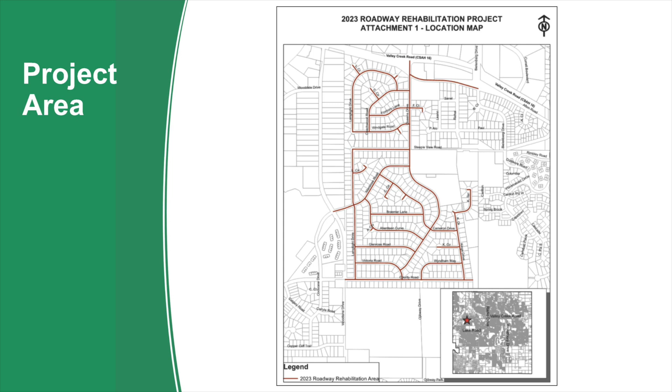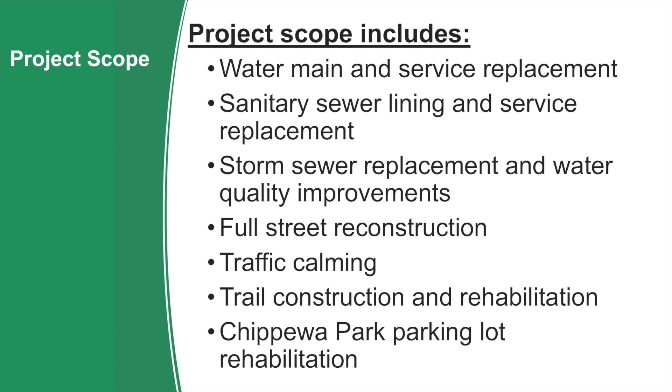So we have our project area. Hopefully you're all familiar with this project. If there's anybody new, just a quick recap of what we're talking about with this road rehab project in the Royal Oaks area. We'll get to phasing here in a little bit, but the project scope generally includes full water main replacement, sanitary sewer lining and service replacement, storm sewer replacement, full street reconstruction, traffic calming, trail construction and rehabilitation, and also repaving the parking lot at Chippewa Park.

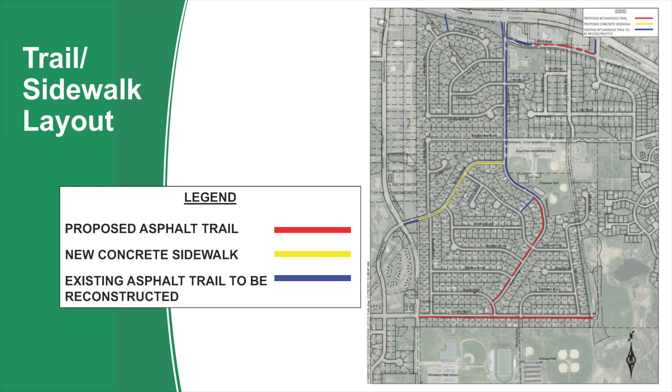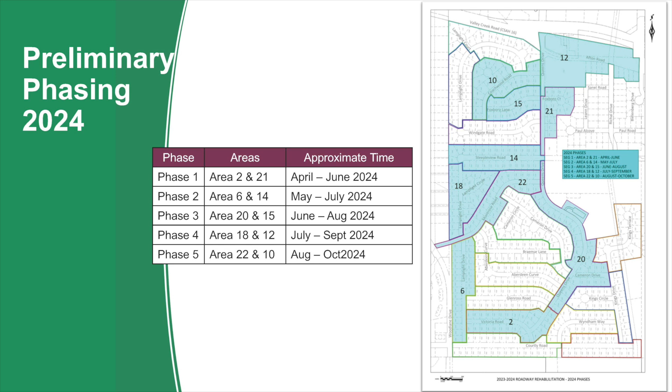So phase one here is going to start end of the month, and each phase will be about two months. We'll get into what to expect for those two months. But basically, generally there's going to be four areas under construction at the same time, so a very impactful project. It'll be a two-year project, so this is the 2023 areas, and these are our 2024 areas. Again, this is posted on the city's website as well.

So this is kind of what to expect in those 2 months. The first week, we'll have some traffic control. They'll be putting up barricades and signs, temporary water, which we'll talk about, and the removal of curb and asphalt. Then a few weeks of underground utility work, street excavation for a week, and then we'll be putting it back together for about 3 weeks, and finally some turf restoration.

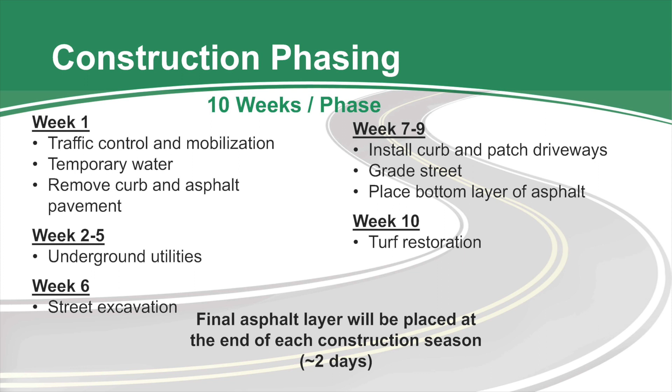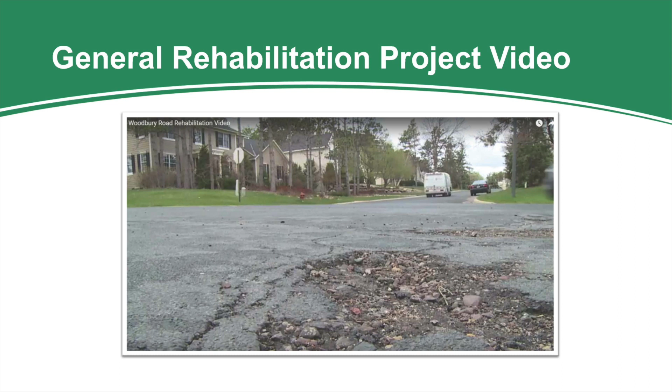This is a video so you can see what we're talking about when we mention curb replacement, pavement replacement, and utility repair. James, if you can put it up.

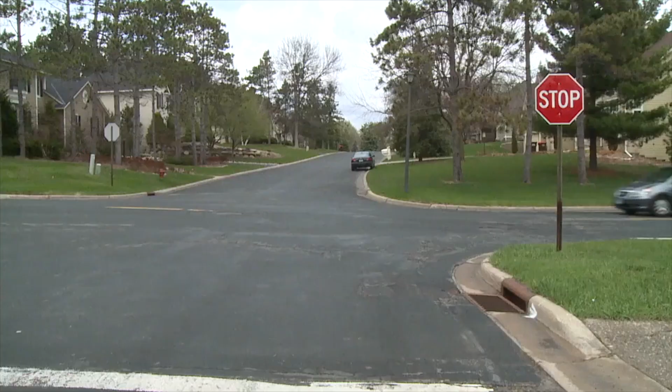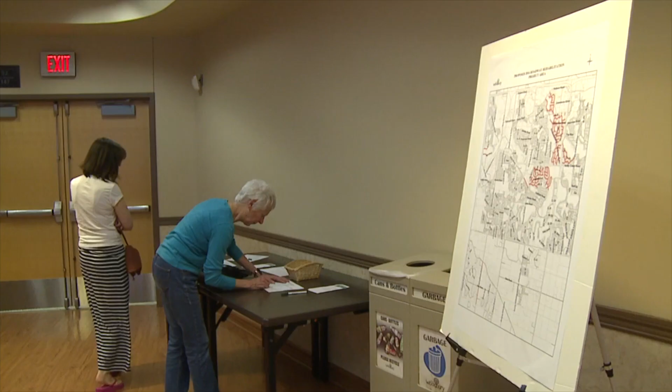Every year, the city improves sections of neighborhood streets in a variety of areas of Woodbury. Most of the roads are in residential areas, which is why city staff conducts a series of neighborhood meetings, open houses, and public hearings related to the Roadway Rehabilitation project. Residents attending these meetings have the opportunity to learn about the construction process, special assessments and funding, how it will impact them, and ask questions about the project.

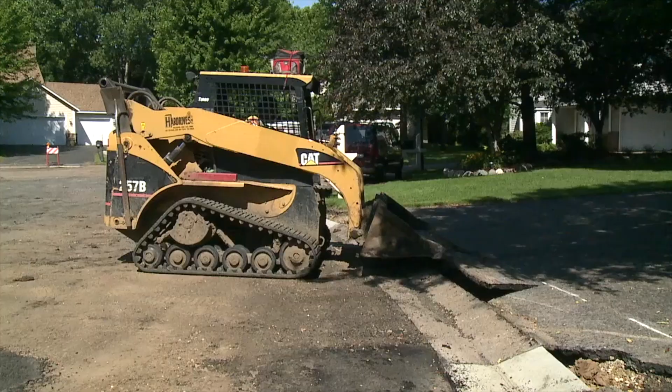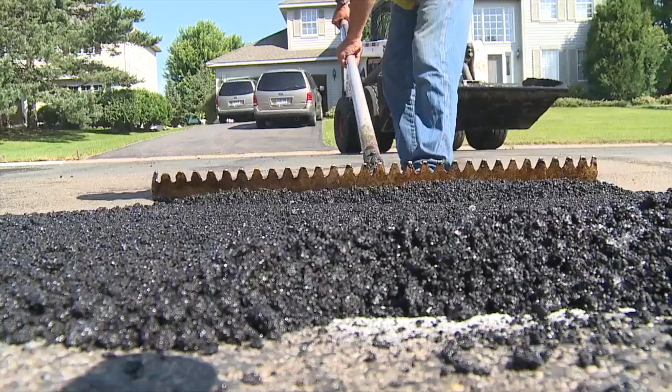Special assessments are a charge imposed for improvements that benefit nearby properties. The amount of the charge bears a direct relationship to the benefit the property receives and is based on the city's assessment policy. Assessments are used as a partial project funding source in addition to general tax revenues and other sources. Once the project is formally approved by City Council, construction begins.

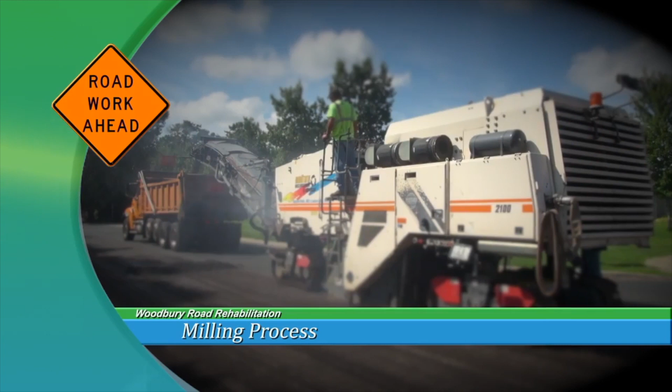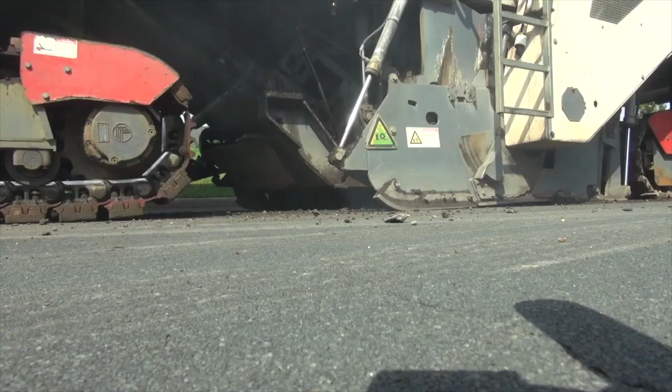The first step in the process is removing portions of the old pavement. A milling machine proceeds slowly down the street as it removes the top surface of the pavement, leaving a rough but drivable surface. In most cases, the roads remain open to traffic through the milling process.

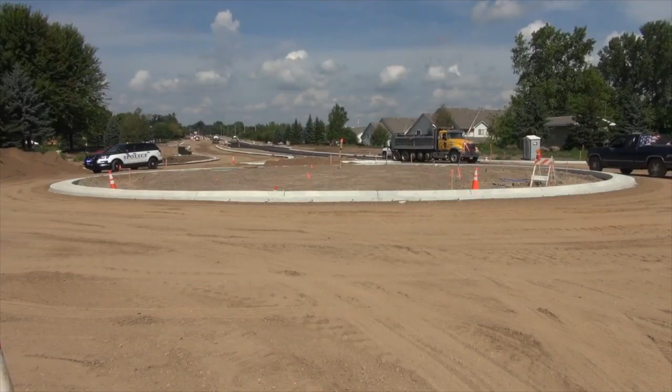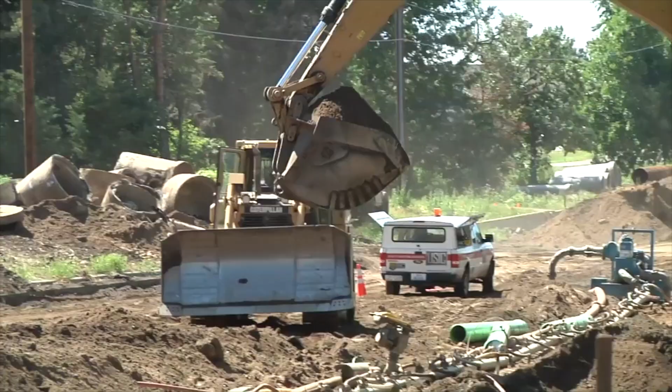Depending on the location of the project, utility improvements might be done in conjunction with the roadway work. These improvements include sewers, water mains, natural gas lines, and communication cables. Utility work requires extensive digging and usually results in temporary lane or roadway closures. Motorists should be aware of detours in these areas.

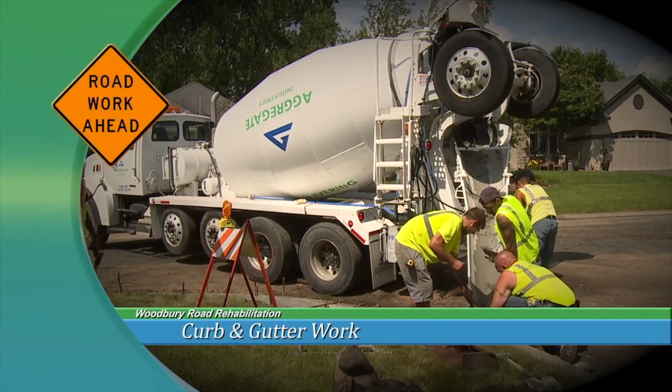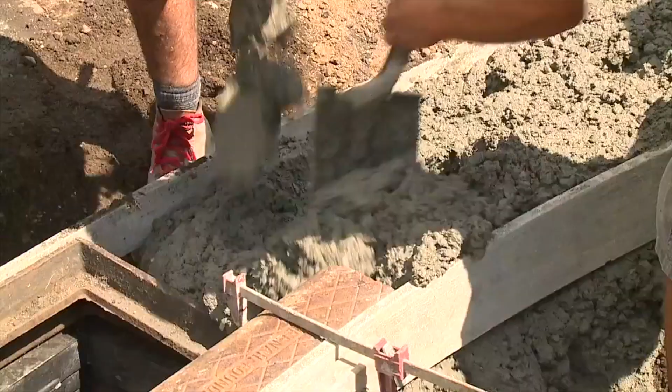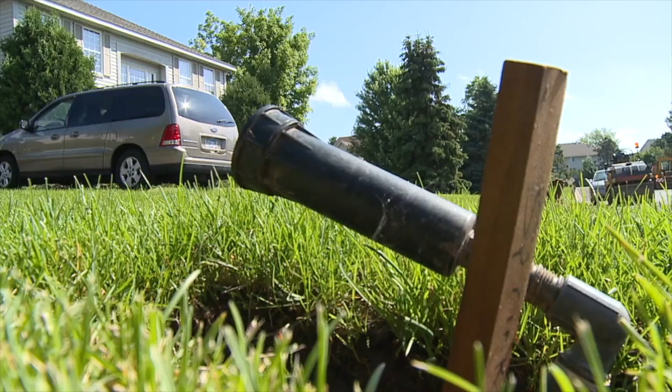All projects involve curb and gutter work. Approximately 1 week before curb construction, sections are evaluated and marked for removal. If your curb needs replaced, you will be notified and given information on how it will impact your residence. During construction, any irrigation systems, dog fences, or other private features within the right-of-way will have to be moved by the property owner. Asphalt driveways damaged during curb replacement will be patched. Damaged concrete driveways will be removed and replaced.

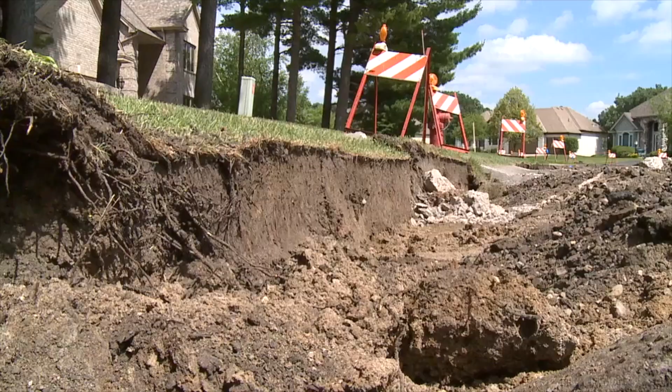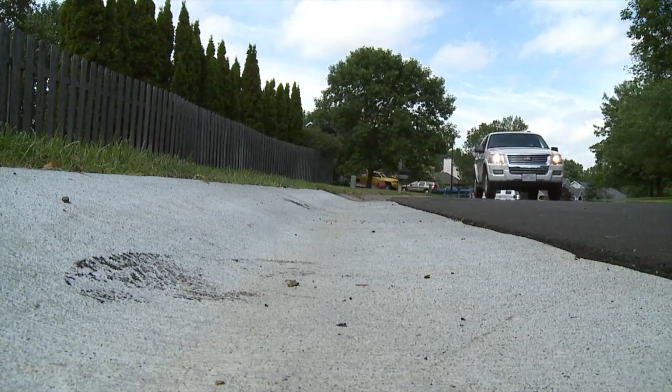Curb work will also impact your lawn. The contractor will replace disturbed areas with seed and hydro mulch, and will care for the area for 30 days. Residents are encouraged to water and care for the areas to achieve the best results. Once curb work is completed, it cannot be driven over for 5 to 7 days.

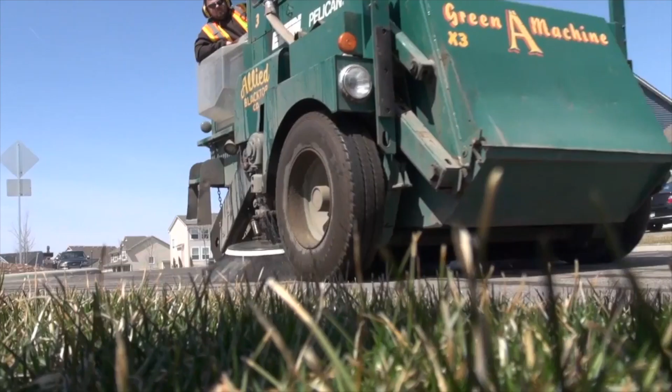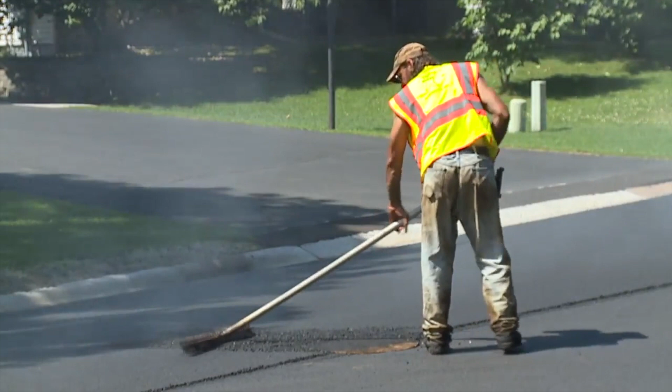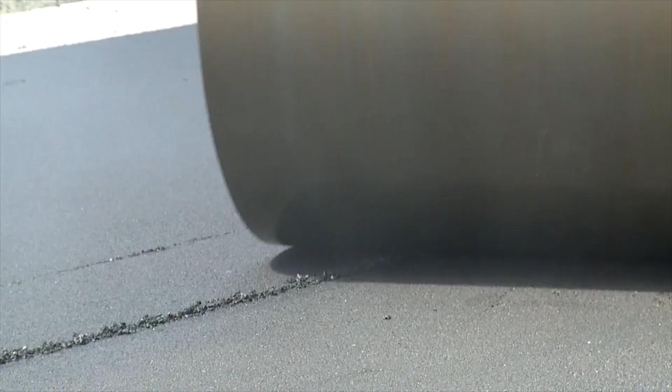Prior to final paving, the street surface will be thoroughly swept. After this step, the final pavement process will begin. Before the new asphalt is laid, tack oil is applied to the road. Residents should avoid driving on the tack oil because it can stick to driveways and vehicles. With the tack oil in place, crews will then begin the paving process. After the new asphalt is rolled and has cooled, it is immediately ready to use.

If you have any questions regarding the project process, assessments, or the scope of the project proposed for your neighborhood, please contact the City of Woodbury Engineering Department at 651-714-3593.

Along with that, we're going to go over some expectations for what construction is going to bring for us. We're trying not to sugarcoat it here. There's going to be some inconveniences, especially with a project this size.

One of the things we've touched on is that weather is going to make our schedule unpredictable. If we have a dry season like last year, we can probably get ahead. If we have a wet season like we've had this winter, or if we don't get warm temperatures, then our construction start date might get pushed back, and all the phases are going to be pushed back beyond that. So we've got unpredictable weather, which means the schedule is going to change.

With this project, there's going to be massive excavations. The water main is about 8 feet deep, so you're going to have a big hole in your street when that work is going on, which will be a few weeks. With that, there's going to be dust and noise. Just be prepared for that, and we'll do whatever we can to minimize impacts.

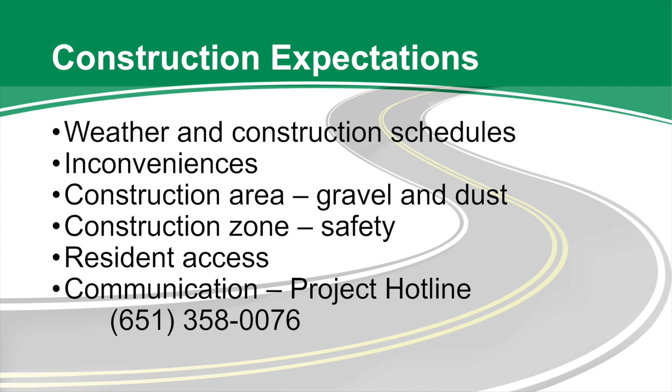If you've got appointments and things that you've got to make, call the project hotline, and we can work with you to make sure that if you've got appointments or essential things that need to happen. Unfortunately, we might not be able to accommodate everything, but if you have any questions, just contact the project hotline.

Safety again, if you've got small children that like watching construction equipment, that's fine, but just make sure that they're staying away from this equipment. They're large, they've got lots of blind spots, so just make sure we're conscious and staying away from the construction equipment.

Resident access, we'll touch on this a little more and Jeff will touch on it when we get to the photos, but the plan is to maintain access for residents for the most part. There will be some times you won't be able to get into your driveway, but for most of this project you should be able to get in and out, and that's going to be the best place for you to park. If you have specific concerns and need driveway access throughout construction, the project hotline is the best place.

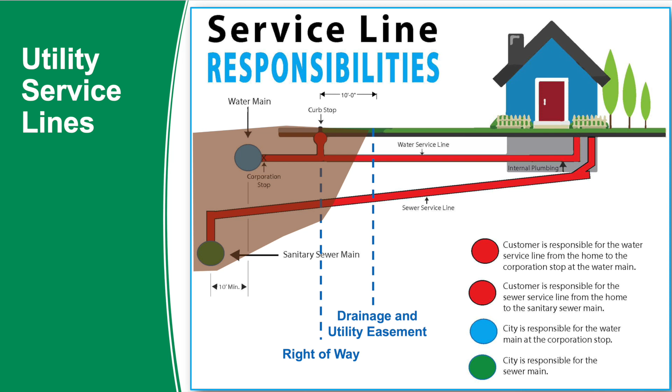And with that, I'll bring it over to Jeff Toutant, who's going to be with Bolton & Menk, and he'll be one of our inspectors on this project, and he can talk about more specifically what to expect with construction.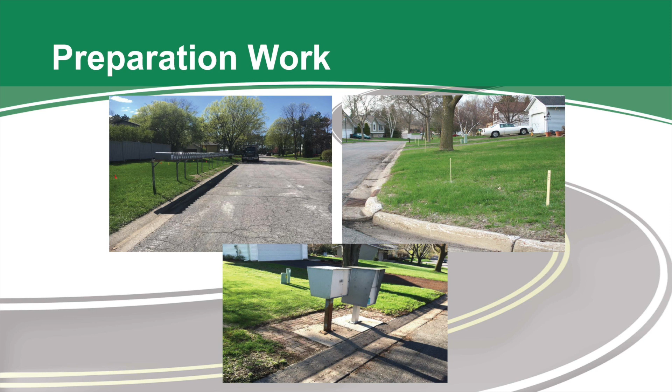I'm going to start things off by saying that video you saw had a lot of very good information on it. Some of that information doesn't necessarily pertain fully to this type of construction we're doing. That project had a lot more street work and a lot less utility work.

What we're going to be doing this year, you're going to expect to see more of the excavation type style at various durations throughout construction. Some of you who live in the early phases of construction might have already seen an initial notice come out about temporary water services. That's going to be the first step of construction that we're going to do.

The contractor is going to come out to the site, and what he has to do is lay out a plastic pipe across the front of yards and make a connection to your existing water line. While that work is occurring, there might be times where your water will get shut off.

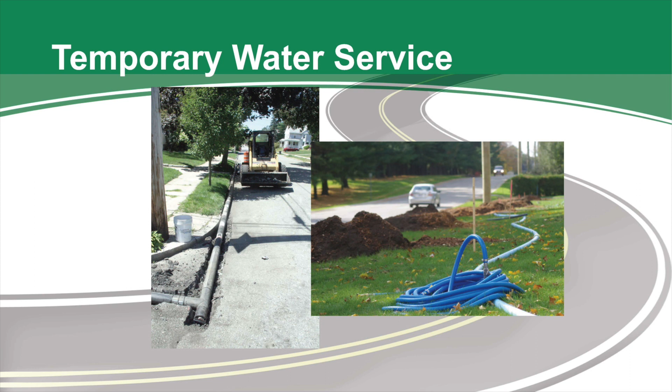You'll always get a notice whenever there's going to be any type of water shutoff in your neighborhood. Typically, the water shutoffs should be 2 to 4 hours. The notices are usually 48 hours in advance, so you shouldn't get a surprise when you wake up in the morning. Any of these notices will be door hanger style notices.

Throughout construction, when we're working in your area, you should keep your eyes open when you're coming home from work. I know a lot of people drive right into their garage when they get home, so make sure you're checking your front door for these types of notices. Also, when we're doing work on adjacent phases to you, your water might be impacted for short durations and shutdowns too. So even if we're not working right on your street at that point, you might still be impacted as far as water service.

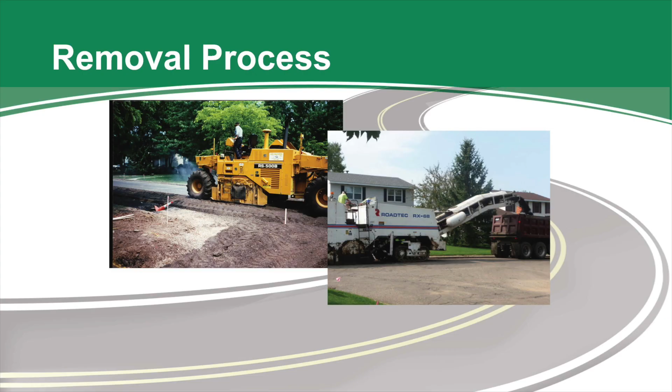Once the temporary water services are set up, the next major step of construction is the removal process. On this project, we're going to be removing all of the existing concrete curb and all of the existing pavement, and there'll be a resultant gravel surface throughout construction. That gravel surface will be maintained throughout construction, so you'll be able to get in and out of your neighborhood.

If you have to drop materials off throughout the day, typically you can get in and stop in front of your house and drop it off, unless the contractor is working right in front of your residence.

When they're working right in front of your house, there may be times during the removal process where you might have a 6-inch, 8-inch, or maybe even a foot drop-off right behind when they do the removals. Just be cognizant of that and keep your eyes open during the removal process. They'll follow right behind and ramp things up, but there might be a duration of maybe 20 minutes to half an hour where you wouldn't be able to get in and out of your driveway.

The first step is, as far as the utility work goes, the contractor will be installing and replacing lines that are out in the street. The last step is making the connections to your existing services in front of your homes.

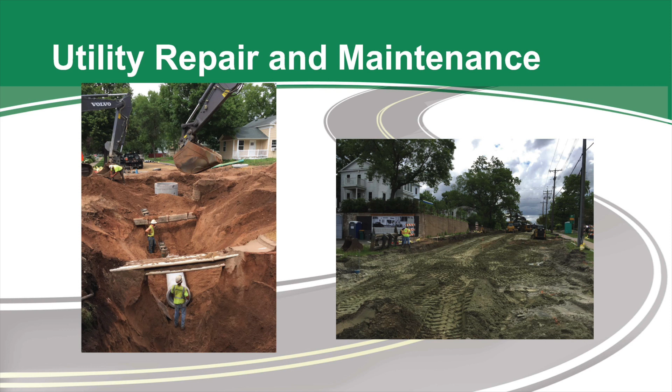When they're working right in front of your house, there's probably going to be a period of 2 to 4 hours where they're right in front of your house, and then it'll be gravel back behind them. While this work is occurring, there'll be trucks going in and out of the neighborhood.

In general, the contractor will do as much as he can. He'll do construction where you see half the road open and half closed. There are some segments where he'll work the full width of the road at a time, but his goal is to do as much half and half as possible because it helps him get his trucks through heading one direction versus going back and forth throughout construction.

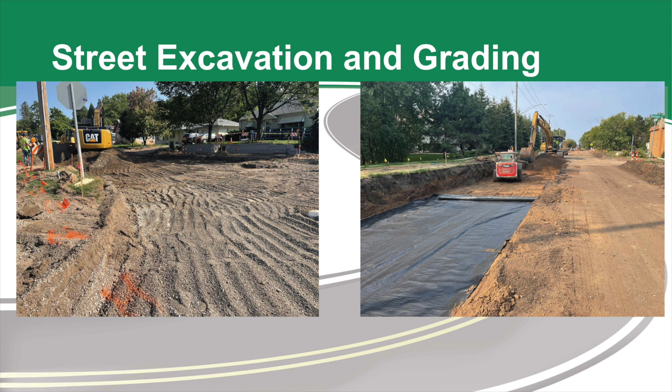Once the gravel placement is done, the concrete curb placement will occur. Most of the curb out here is going to be placed with a machine. There'll be some spot locations where they do hand placement like was shown on the video.

The machine placement is another moving process where the equipment starts on one end of the street and goes down the road. It'll get a whole block's worth of curb done in a day. They move at a walking pace all day long.

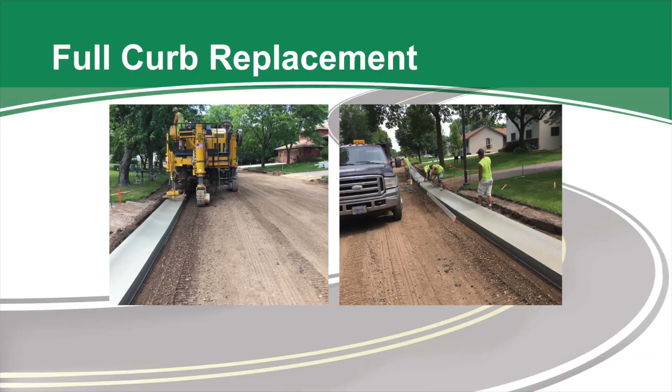So on days where you see the machine maybe down at the other end of the block and you think you're okay and don't need to get out of the driveway, it's important to pay attention to the notices, and if you see that guy coming down the road, make sure you're out as soon as you can. The notices that come will give you information and details of when you should get out of the driveway and where to park during the curbing process.

With the concrete curb placement, there's a period of about 5 to 7 days where you wouldn't be able to get in and out of your driveways. During that time, there'll be designated parking areas on other streets near your neighborhood, in the adjacent phases where there's no work occurring.

If you have any kind of special needs for access, reach out to the project hotline, and you can coordinate. There's an option for the contractor to do driveways and leave a piece out.

Obviously, for ease and speed of construction, if it's possible for you to walk versus needing driveway access in and out, it does help speed up construction. But we understand there are people with needs to get in and out. So make sure you coordinate that with the folks at the project hotline who'll be out in the field on a daily basis.

The concrete driveways will follow right behind, usually a day or two behind the curb placement. That way the curb cures and gains its strength about the same time that the concrete driveways do, to try to minimize the amount of time that you're not able to get in and out of your driveways.

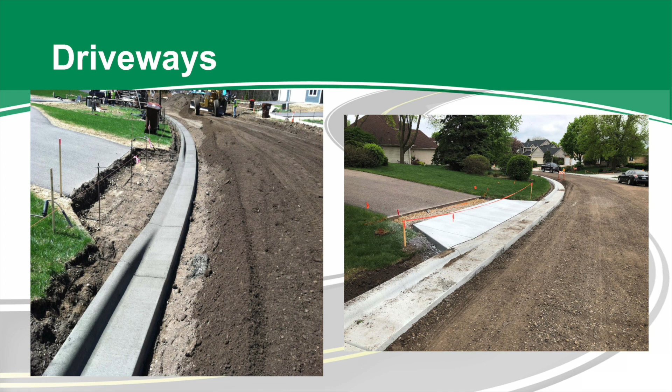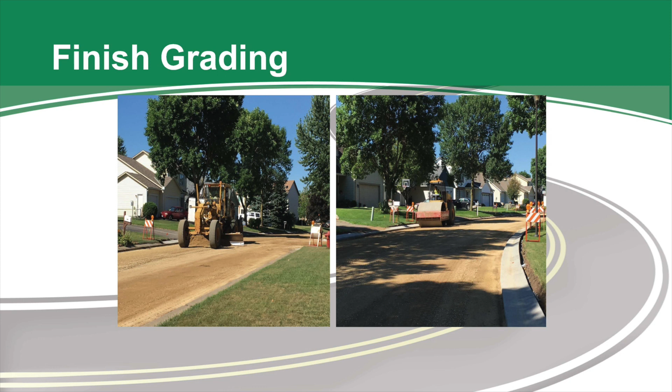Once all the concrete work has had its cure time, the contractor will come through and use grading equipment. It takes up about half the road width each time he makes a pass, prepping that gravel for the final layers of pavement. Usually you'll be able to get in and out of your driveways by that point, and they'll put little ramps in front of the curb so you can drive up over it. If it's the first day or two of this grading process, you might still be asked to park on the adjacent streets.

The paving process follows right behind the aggregate grading. For the pavement process, the contractor places his hot asphalt, and the rolling equipment follows right behind the paver. Typically, from the time the black pavement is initially placed, it's about a half hour before that roller makes a couple passes on it. Once it's been driven over a couple times with that roller, you're okay to drive on it. One thing we ask of residents during the paving process is to avoid turning your steering wheel with your vehicle parked in place, because it will dig in a little bit on the first couple days after the new pavement is placed.

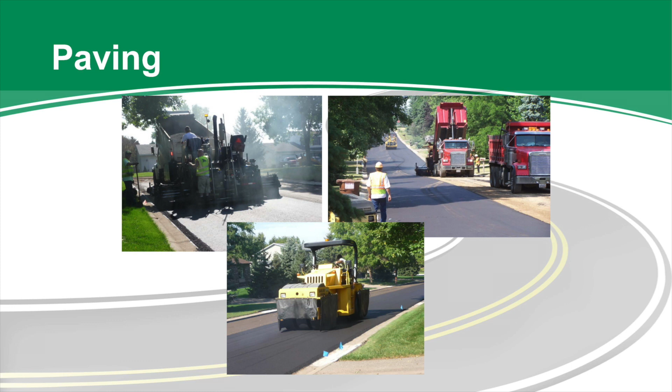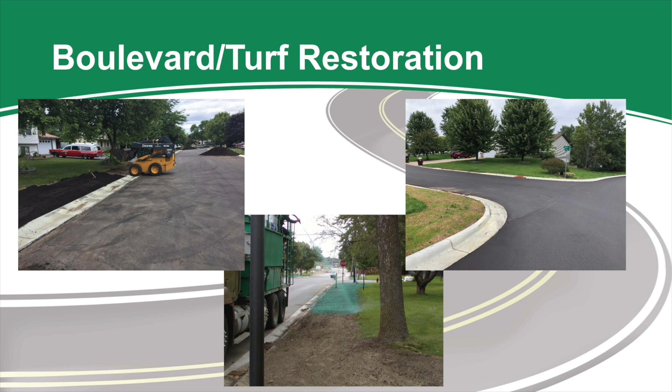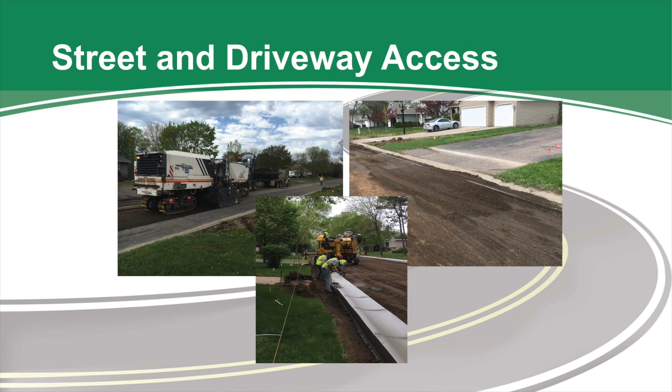I think I've hit on some of the main things for street access during construction, but I want to reiterate, if you ever have concerns about when you can or can't get into your driveway, make sure you're calling that project hotline. That really should be the biggest takeaway from this meeting - the project hotline is the best way to get a hold of folks out in the field. You've probably seen that number 4 or 5 times already in these slides, so we really want to make sure people are reaching out to that hotline. If there's any special needs, or any reason you'd need to get in and out of your driveway, maybe some type of event going on, that's the stuff you want to coordinate with the project hotline. That'll go directly to folks out in the field on a daily basis, so they'll know exactly what's going on in the field that day.

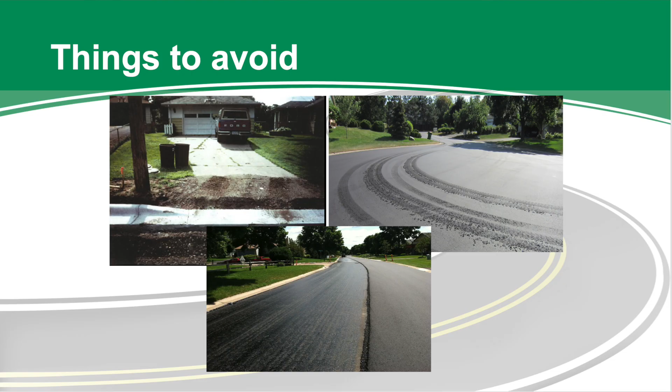And I'll turn it back over to Mike - he can talk through some of the frequently asked questions.

All right, so there's also a handout with a little more information. This just kind of covers some bullet points of frequently asked questions.

Right now, the project is tentatively scheduled for April 24th, and you'll see some construction equipment before that. They'll be starting some temporary water work before then, but you won't see any excavation equipment likely until that April 24th date, and that has to do with some spring road restrictions.

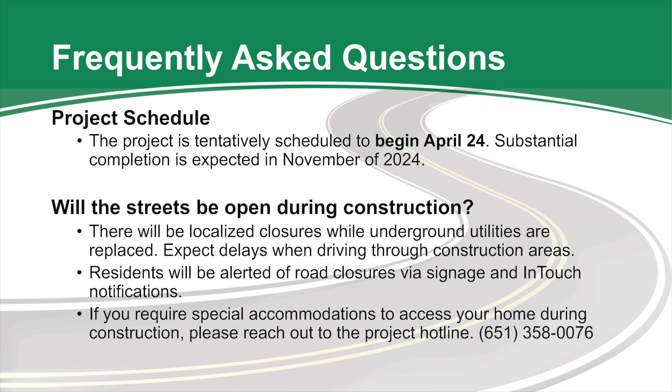The streets will generally be open during construction. I think Jeff covered this one pretty thoroughly, but there will be some closures when they're doing some of the utility work, and the notices will have more information on that.

General working hours are 7 a.m. to 7 p.m. Occasionally, the contractor might have to work a little beyond 7 p.m. if they've got something they have to wrap up. The city working hours are 6 a.m. to 10 p.m., so they are allowed to deviate slightly from this, but to be courteous to the residents, we ask the contractor to stick to the 7 to 7 as much as possible, except for maybe some rare occasions where they may deviate from that.

Driveway access, again, the best place to park during construction is going to be in your driveway. That's going to keep you out of the way. There will be some times where, if they're doing work behind your driveway, you won't be able to get out. So pay attention to the notices and ask questions if you've got appointments you have to make.

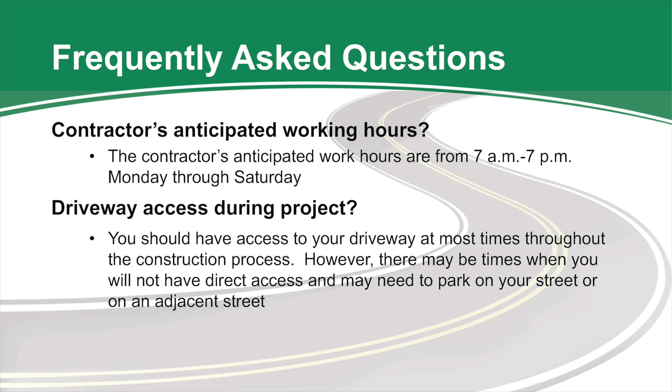And then, of course, during the curb placement, you won't be able to park in your driveway for about 5 to 7 days. But when the curb is put in front of your driveway, you can still drive up to your driveway, and if you've got groceries and things, you can drop those off. So we're not expecting you to carry groceries 4 blocks.

This is kind of a big one that we need to touch on, is the irrigation systems, underground dog fences, other landscaping features. The city cannot reimburse or repair anything that's damaged within the right-of-way or within these drainage and utility easements, which is where the construction is going to happen. So if you have questions or concerns about that, this hotline is the number. But any damage to irrigation is the responsibility of the property owners.

And this is a question that we've gotten a few times: will the contractor offer any residential driveway or service repair? Not for this project. With the size of this project and the timelines they have to meet, they just don't have time to take on any of that additional work.

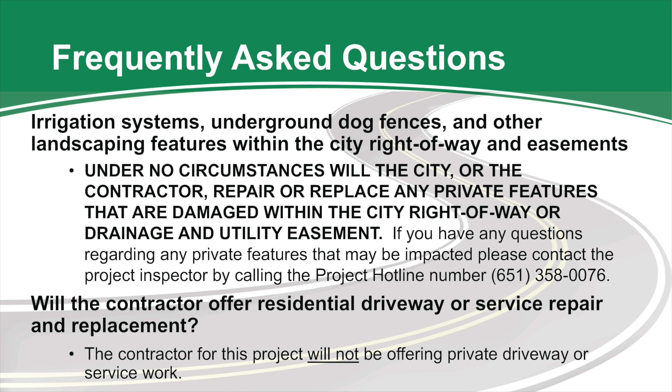So turf restoration, the contractor is going to be responsible for getting the turf restored. They're going to be responsible for watering it, seeding it, putting that mulch on there. What we like to say is, if you want your turf to succeed, it doesn't hurt to help it out and spray it with a hose. We do have watering permits available if you wanted to help it out. But ultimately, the contractor is responsible for getting that grass to grow.

And then garbage and mail services will be maintained throughout the project. There may be some times when they're doing that utility work where they'll be pulling the garbage cans. The contractor will be responsible for pulling the garbage cans from the bottom of your driveway to a pickup location. They'll mark the garbage cans and recycling so they know which ones to bring. But generally, the garbage and recycling will have access to the neighborhood.

And there will be temporary mailboxes placed in various places. Your notices will tell you where your temporary mailbox is going to be during construction. And the contractor is responsible for replacing your mailbox after construction.

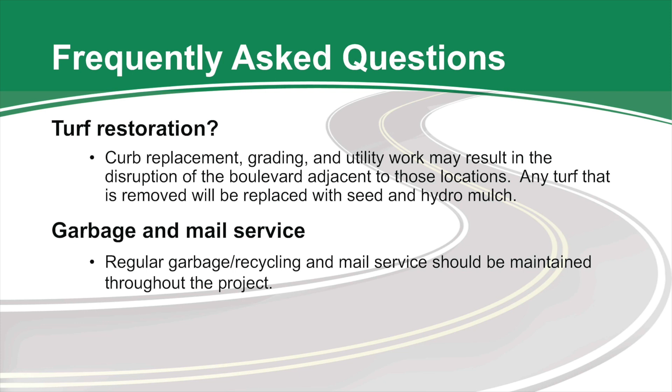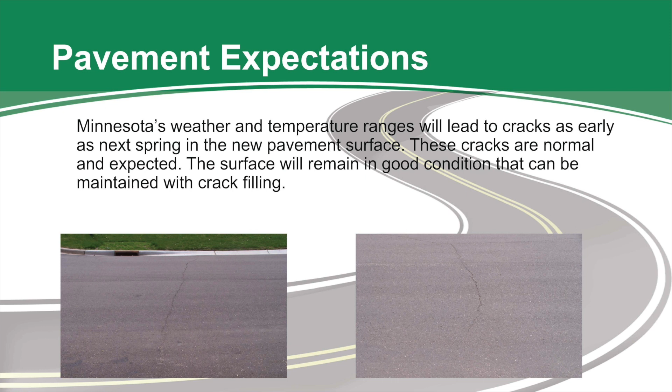The other thing we will be doing the year following paving is putting a rejuvenator on the pavement to extend its life. So expect a year after construction to see them spray that asphalt rejuvenator on there. It won't be anything like this construction project—it'll be a 20-minute kind of project versus this one.

We just wanted to make everybody aware that there's some other construction going on in Woodbury this year. I-94 between Century Avenue and St. Croix River is going to have a major project going on there, so if that's your route, definitely check out the website. And then the Gold Line project is starting, and they've got some lane closures happening now that will continue through summer. If you have questions about that, we've got a link to the city's website there.